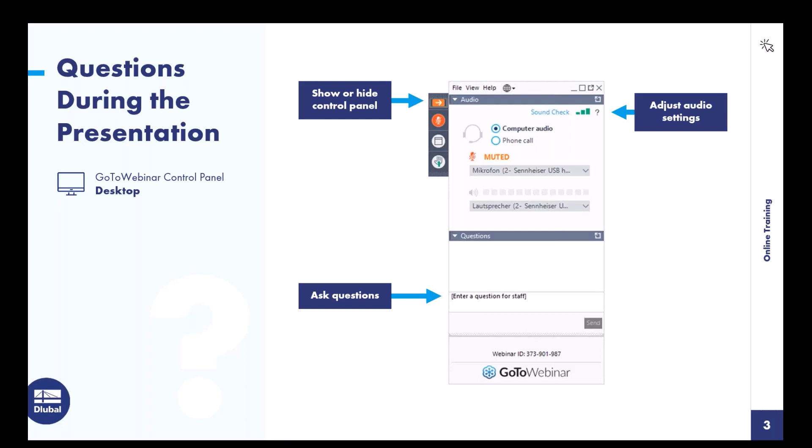I would now like to give you a brief overview of the training series. In today's training, you will receive an introduction to the strength of materials. This builds on the first training, which explained how internal forces are calculated. Today, you will learn how cross-section values and stresses are calculated. In upcoming training courses, you will receive an introduction to finite element analysis and then to our design modules.

This brings me to today's training program. I will first give you an introduction to the R-Section program. Using several examples, I would like to show you the modeling options and design methods. In the first example, a thin-walled I-profile is modeled with graphic functions, and I will model it slowly so you can enter this cross-section as well. In another example, I show how to insert cross-sections from the database and add other parts to them. Then I show modeling of a massive cross-section based on a DXF template. Finally, I model a hybrid cross-section.

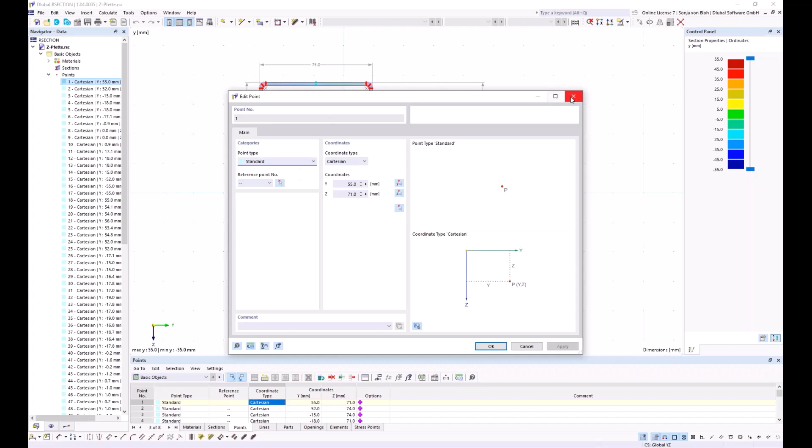It's also possible to open the dialogs for creating new objects. If I go to points, it's possible here to add a new point.

The display navigator, I will turn to this, controls the graphical display in the working window. If the checkbox in front of an entry is unchecked, this object is hidden in the graphic. If I uncheck here the points, you see in the graphic that the points are no longer displayed.

The result navigator controls which results are displayed. You can change here between statical moments, unit stresses, and so on.

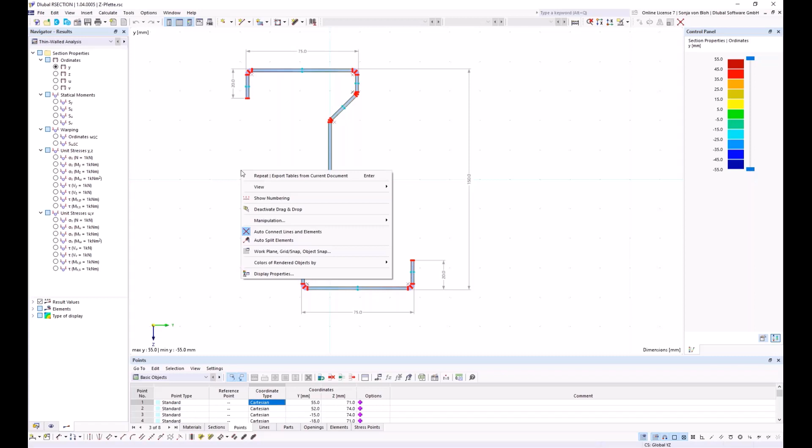Then I would like to go into the mouse functions. To move the section, you can hold down the mouse wheel and move the section accordingly. You can turn the mouse wheel to zoom in or out, and right-click opens the context menu. You can also select objects with the mouse - if you open a window from left to right, everything completely within the selection area will be selected.

If you drag a window from right to left, everything that is intersected by the selection area will be selected. You can also select individual objects. To do this, left-click on an object that you want to select.

To add objects to the selection, hold down the Control key and then left-click on the next object that you want to select. To remove objects from the selection, hold down the Shift key and click on the object that you want to deselect. For the first part of the training, I am now starting a survey again.

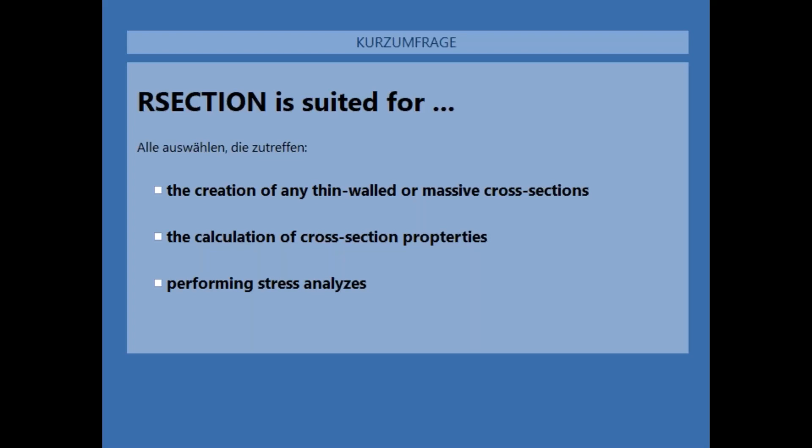All answers are correct. RSECTION is suited for the creation of any thin-walled or massive cross-section, and also for the calculation of cross-section properties and stresses.

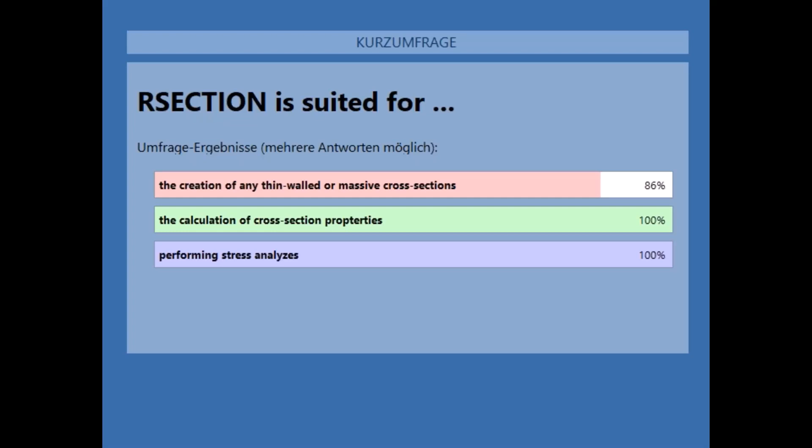This brings me to the first example. To create a custom cross-section, I open the new model window via this button here. Then I have to give the model a name, and I name it here example 1.

Furthermore, the analysis method must be defined. This is here in this chapter, and the following analysis methods are available: the finite element analysis and the thin-walled analysis.

The effective cross-section can be calculated for both analysis methods after activating the extension here under the options. A standard must be selected according to whose rules the individual parts, or the subpanels, are to be generated, and the effective cross-section is to be calculated.

The following standards are currently available: Eurocode 3 Part 1.1 for steel sections, Eurocode 3 Part 1.3 for cold formed sections, and Eurocode 9 for aluminum sections.

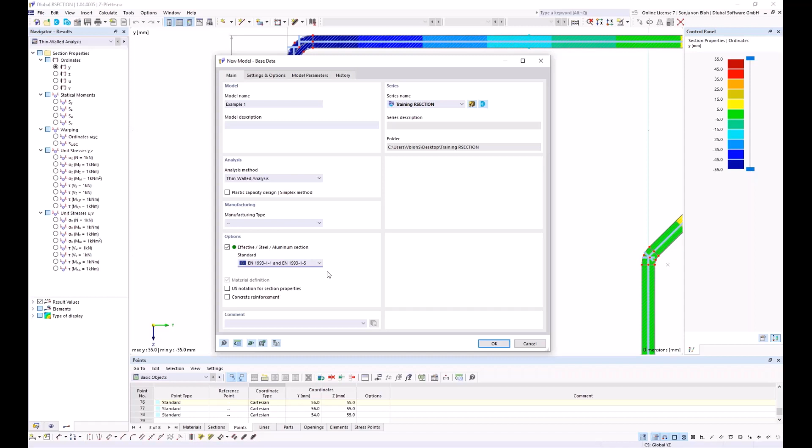I choose here the Eurocode 3 Part 1.1, and then I click on OK. The selection of the design method or the standard is irrelevant when using the R-section cross-section in RFEM or RSTAB. You can select the design method in RFEM or RSTAB regardless of what is set in RSECTION.

Furthermore, the subpanels are generated in the design modules based on the standard selected in the design add-on. In the steel design add-on, the manufacturing type determines which part of the standard is used for the design. For cold formed cross sections, the standard Eurocode 3 Part 1.3 is used, and for hot rolled or welded sections, the standard Eurocode 3 Part 1.1 is used.

Now the file is created. I first define the material, and for this I open the Edit Material window. I can create or copy another material on the list via this button. This creates a new material, and this copies the selected material.

I can enter a material name here directly. RSECTION then lists all materials that match that name. If I enter here S355, then RSECTION lists all materials with that name that are within this database.

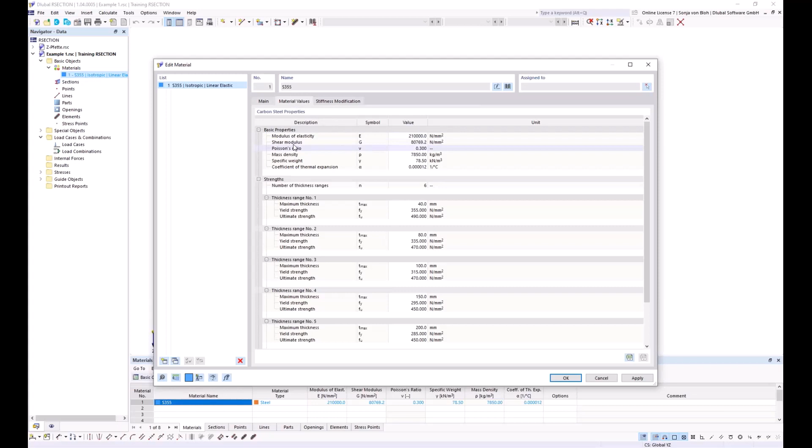If the material is not in the material library, I can create this material by activating the user-defined material option. I can adjust the material values in this tab of material values if I want to. I don't want to do this today, so I uncheck this option again. Then I click on OK.

I then create the elements. The definition of elements is required if the analysis method, analysis of thin-walled structures, is selected, or if the effective cross-section is to be calculated.

An element must always lie in an area. This area is called a part in RSECTION. Elements can be created graphically or via a dialog.

The graphical input is called up via the symbol here in the toolbar, and the input via dialog is called up via the navigator data. If I go here, I can create a new element via the dialog.

When creating an element with graphical input, the part is also created. When creating an element via the dialog box, the parts and the points of the element must be created beforehand. This is why it's not possible here to call up this dialog, because I haven't created the points before.

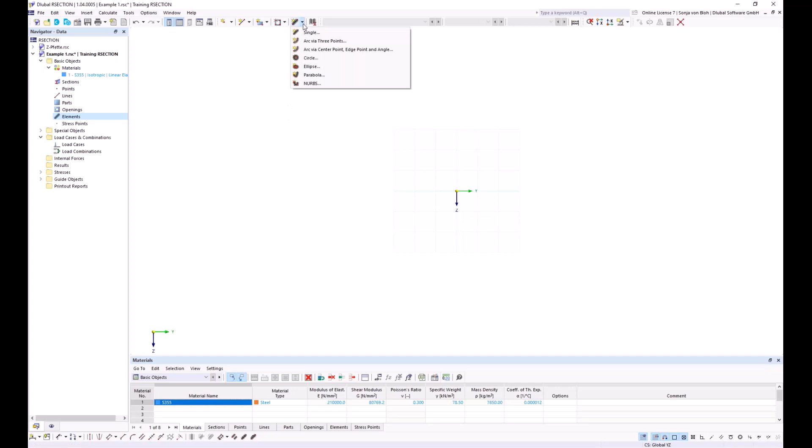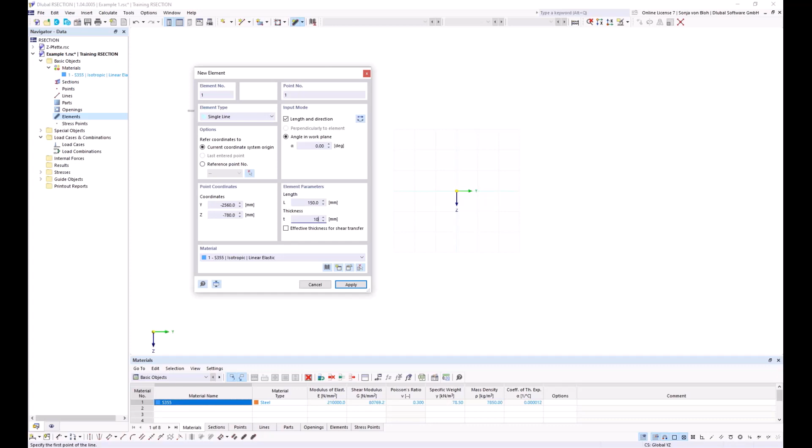I enter the element graphically, so I use this function single, and I enter the bottom flange here first. I choose the input mode, length, and direction, and I choose an angle on the work plane of 0 degrees. I define for the flange a length of 150 millimeters and a thickness of 10.7 millimeters, and then I left click here on the working window.

Then I create the web. Elements must be connected for the calculation of the effective cross-section. The connection is made via the start and end points of the elements. If two elements share the same points, they are connected.

For the web, I also use the input mode, length, and direction. Here I define an angle in the work plane of about 90 degrees, and I change the direction. Then I define the length of 289.3 millimeters and a thickness of 7.1 millimeters.

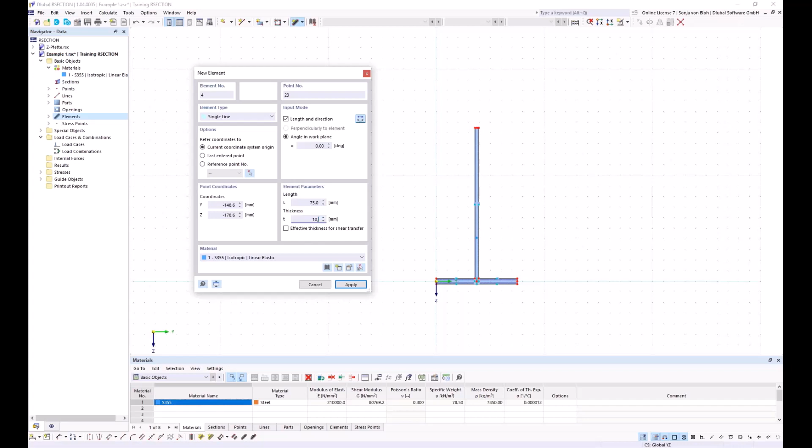I create this web. Then I create the left flange, and for this I also use the input mode, length, and direction. Here I change the angle on the work plane to 0 degrees. I change the length to 75 millimeters and the thickness to 10.7 millimeters.

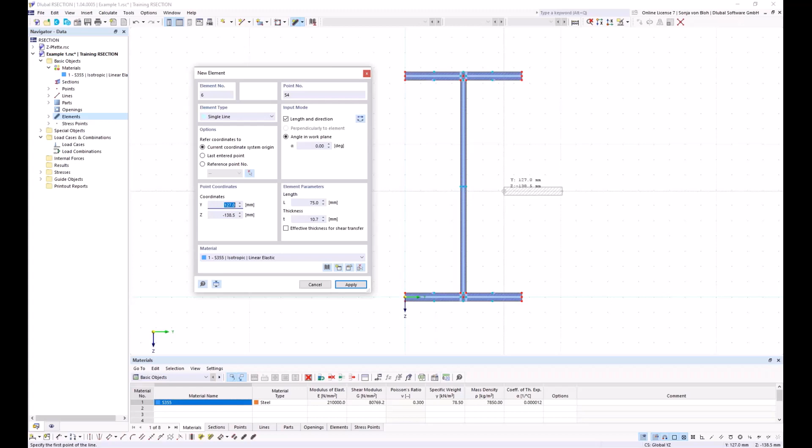Now I have to create the flange on the right side. For this, I reverse the direction, and then I create this element. I now click on the right mouse button. This closes my window. The profile should be a rolled T profile to which a lower flange is welded.

The round radius is 15 millimeters. I can define lines to create them or use the create round corner function. I find this function here below, and in this dialog I have to define the round radius. This should be 15 millimeters, and then I click on the corresponding lines.

Then I click on the right mouse button to close this window. The lower flange is welded with a 6 millimeter double fillet weld. I create the welds using the create angled corner function. I find this here. There are two corner types: both edges, where I can define the length of the edges, or corner type edge and angle, where I can define just one length and an angle.

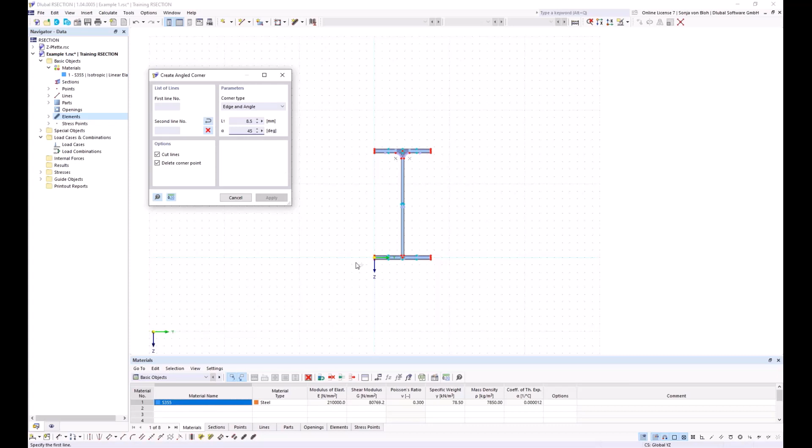You can also calculate in the dialog. So I define 6 multiplied by the square root of 2, and I define an angle of about 45 degrees, and then I click on the corresponding lines.

I would also like to use this example to show you how to calculate stresses and the effective cross-section. In order to calculate stresses or the effective cross-section, a load case must first be created. A load combination can also be formed.

I create a load case first, and for this I go into the navigator data, right-click, and choose a new load case, and I name it N. And I want to create a second load case. For this, I use this button, create new load case, and I name this load case M.

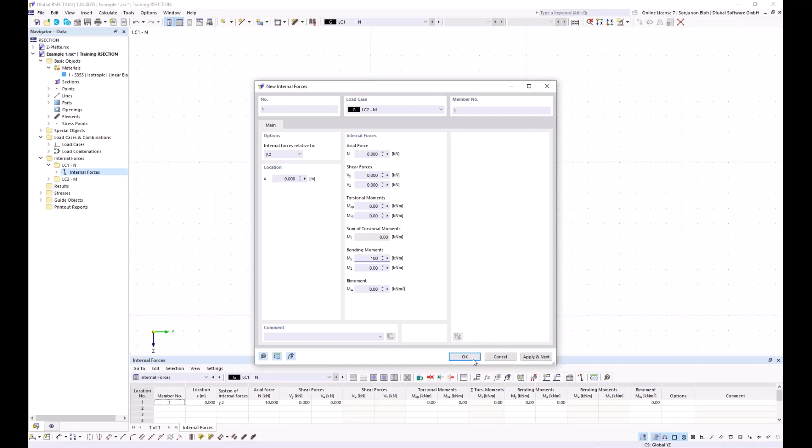And I click here on OK.

The blue dots you can see on the graphic are the stress points. Stresses are calculated and displayed at these stress points, which are generated automatically, though they can also be defined manually.

I want to do that here, so I go to the navigator data again. I find the three stress points, right click, and define a new stress point. It's possible to define the coordinates manually, or to select a point in the graphic and import its coordinates.

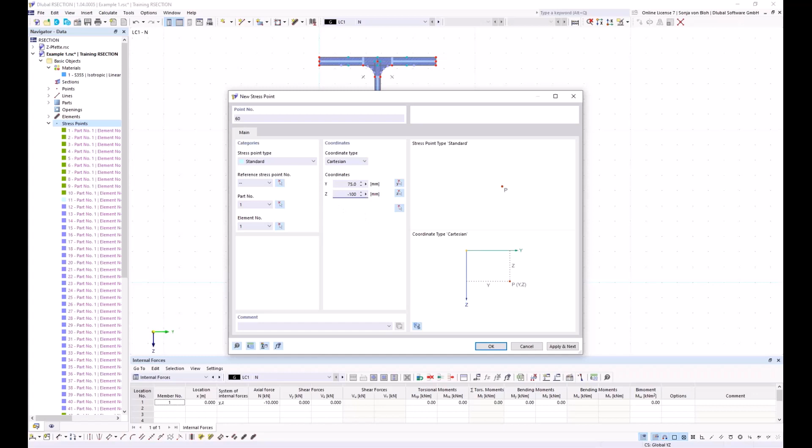I define here for the Y direction 75 millimeters, and for the Z direction -100 millimeters, then click OK. This stress point is now created. If I want to find it, I can right-click on the stress point in the navigator data and use the find function, and you see the stress point is located here.

Which stresses are to be calculated and output in tabular and graphical form can be set in the stress configuration, found also in the navigator data under Stresses, Stress Configuration. If you double click on it, the corresponding window opens, and here via these checkboxes you can check or uncheck the stresses you want to calculate.

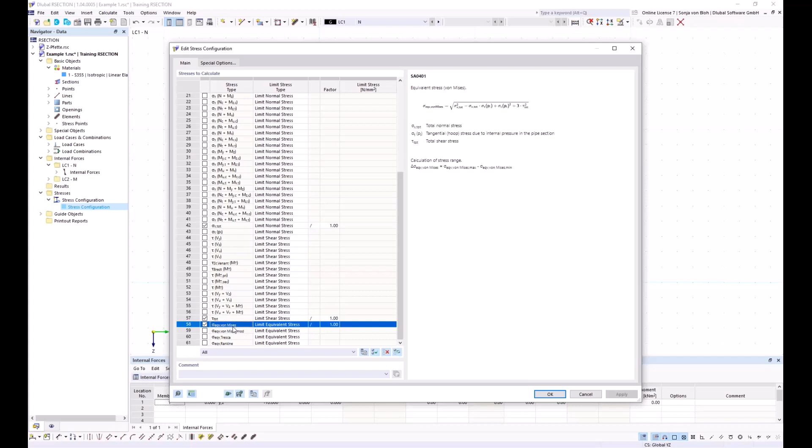Here, these stresses are calculated: the total normal stress, the total shear stress, and also the equivalent stress. I don't want to calculate more stresses, so I click OK.

I'll start the calculation now. For this, I choose in the menu Calculate All.

In the results navigator, you can switch between the gross cross-section, which is the thin-walled analysis, and the effective cross-section, which is the effective thin-walled analysis. The same is possible in the result tables, where you also have the possibility to switch between thin-walled analysis and effective thin-walled analysis.

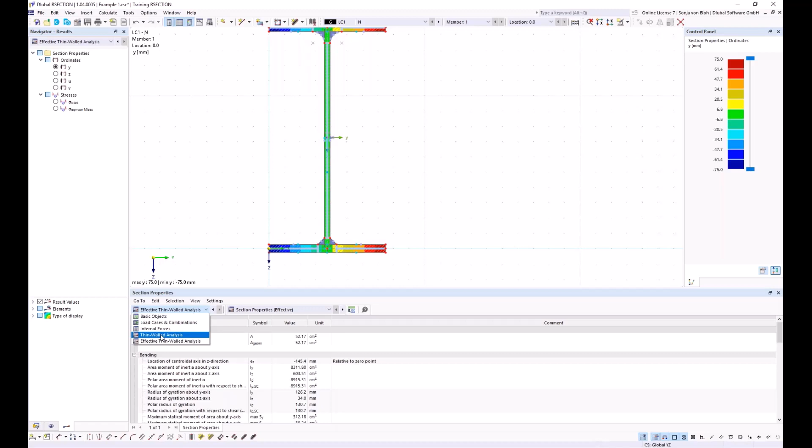Furthermore, you can switch between the results of the individual load cases, and you can also display the stresses. Now the stresses sigma x total are shown for load case number 1. If you want to see the stresses for load case 2, you have to choose that load case here.

I first look at the results of the gross cross-section for load case N. The display type can be set also on the results navigator, where you can change the type of display. I change it here, choosing off.

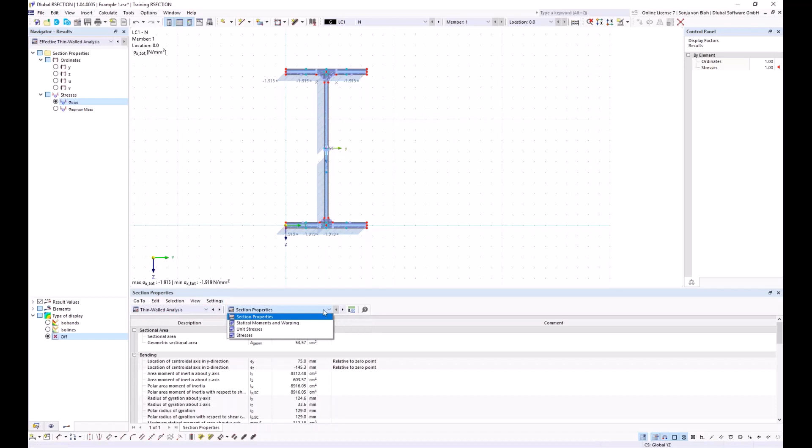I can see the cross-section values here for the gross cross-section. If I choose thin-walled analysis, then you can see here the section properties. The section area is calculated, as well as the area moment of inertia about the Y and Z axis, and so on.

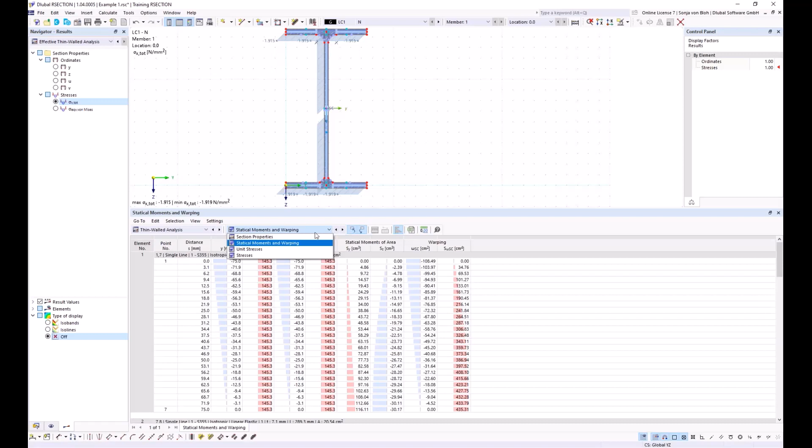You can also see in the tables the statical moments, and it's possible to see the calculated stresses numerically. It's also possible to show these results graphically; you can see the statical moments and also the stresses on the gross section.

If I now want to display the stresses at a specific stress point, I have to switch to the tab All Stresses by Stress Points. If I choose this stress point that I created manually, then the results are displayed for that stress point in the table.

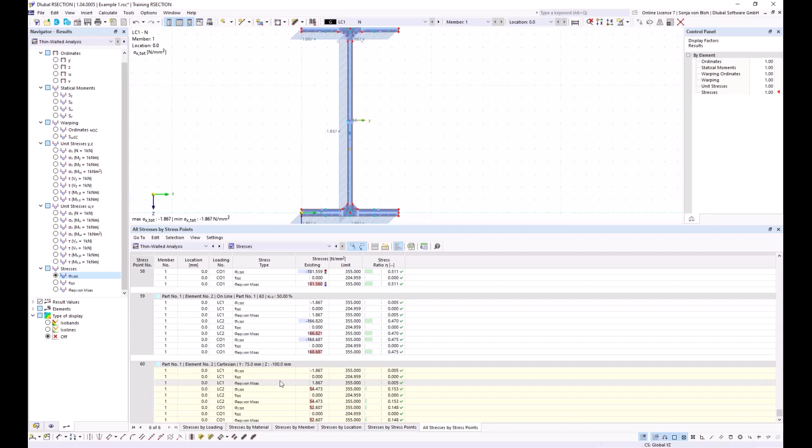In the case of the results of the effective cross-section, in addition to the results of the gross cross-section, there are also outputs for the classification of the cross-section and the effective width of the cross-section.

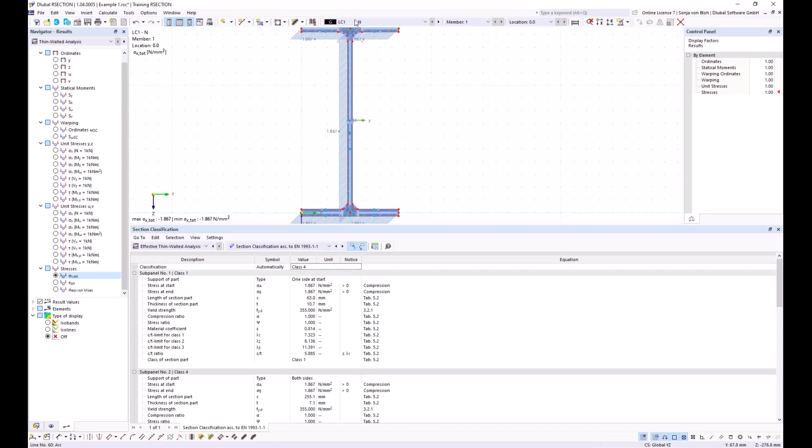I choose here the effective thin wall analysis. I have the section properties of the effective cross-section, and here the section classification. I see that the section falls into class 4 for this load case, axial force.

Local buckling occurs in class 4 cross sections. According to the standard, the reduction in strength due to local buckling can be taken into account through effective widths, and you can see this here in the graphic.

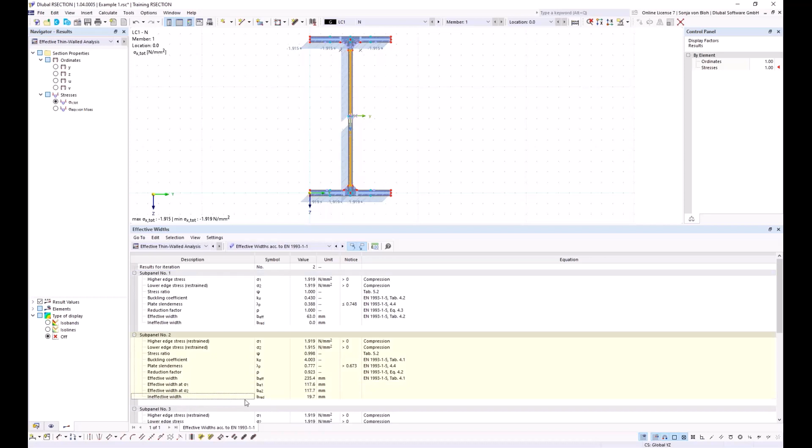If I change to effective thin walled cross section, the web falls into class 4, and therefore the effective widths are calculated. Here an ineffective width of about 19.7 millimeters is calculated, and you can see this reduction graphically.

It's also possible to look at the results of my load case 2. You can see here that for load case 2, this cross section falls into class 1, so no reduction is made.

I'm now starting a survey again regarding the requirements for cross-section classification. I start this; multiple selection is also possible.

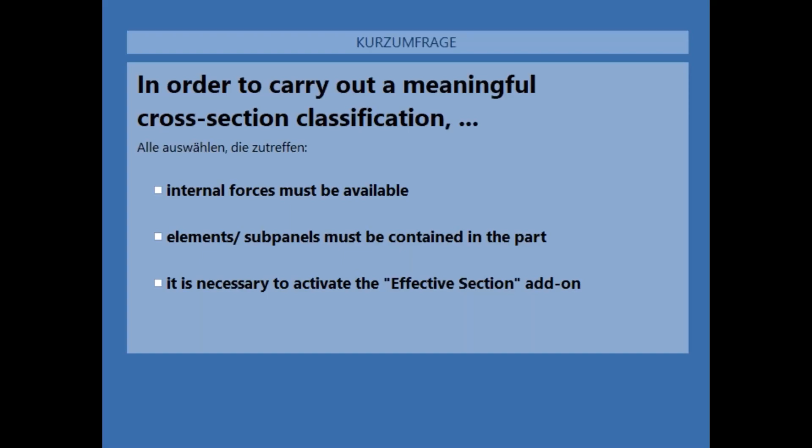Okay, I close the survey and then I share the results.

All answers are correct. For a classification, internal forces must be defined, elements must be defined, and it's necessary to activate the effective section add-on.

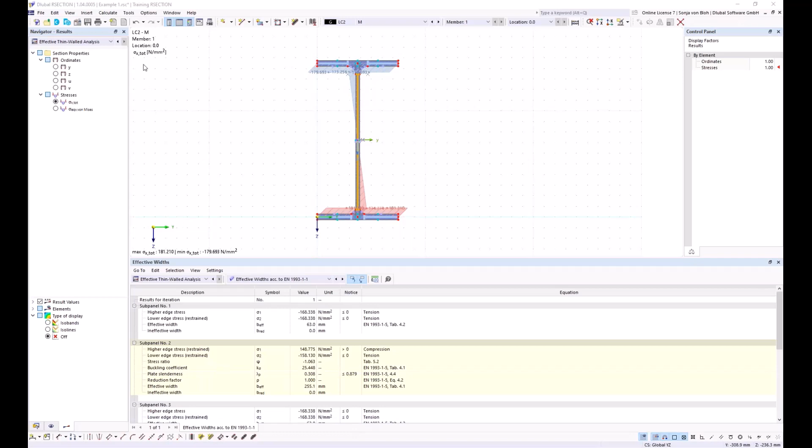I would now like to use another example to show you how you can access cross-sections from the library and modify them. For this, I create a new file. I click here on this button, New File, and name it Example 2. I choose here the analysis method, thin-walled analysis, and I want to calculate also the effective cross-section.

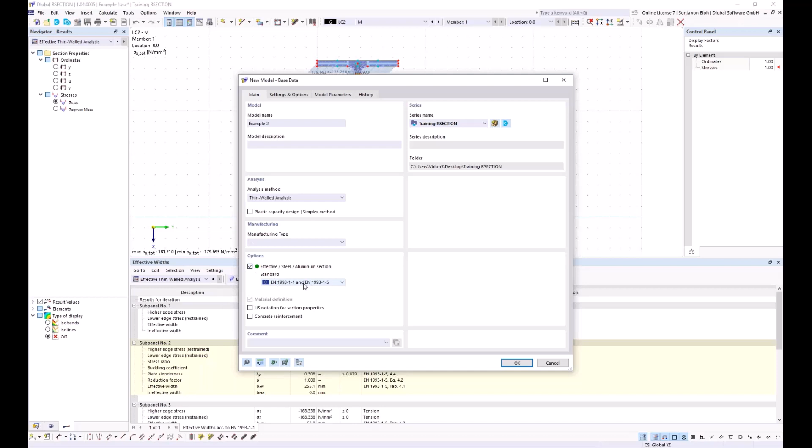So I activate this checkbox again, and I choose here the Eurocode 3 part 1-1. Then I click on OK.

Then I define the material. For this, I double-click on the material and open the material database. Here I choose this S235, and I click on OK. Now this material is defined.

Then I insert a cross-section from the cross-section library. To do this, I open here the new section window in the data navigator. The window is structured like the material window.

A cross-section can be created or copied via the list here. You can create a new section or copy selected sections. I can also enter the name directly here, maybe HEB 100, and then you can see all cross-sections with that name in the cross-section library.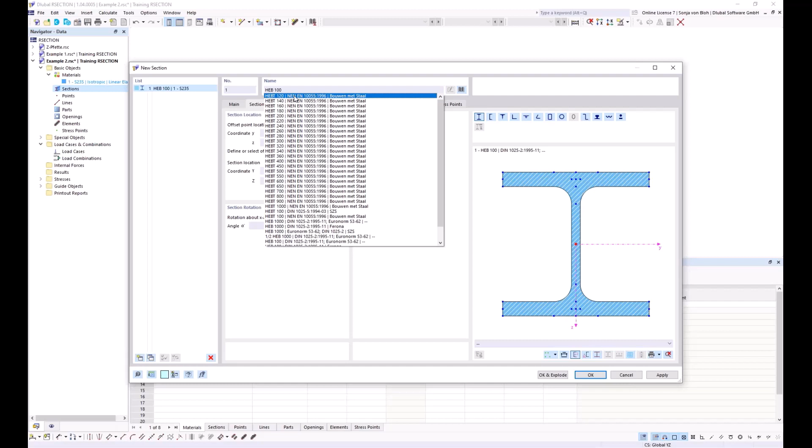I can also open the cross-section library via this button here. A large number of cross-sections have already been entered into the cross-section library. I choose here standardized L cross-section. In the cross-section library, like in the material library, I have filters here on the left, or a search to quickly find the cross-section.

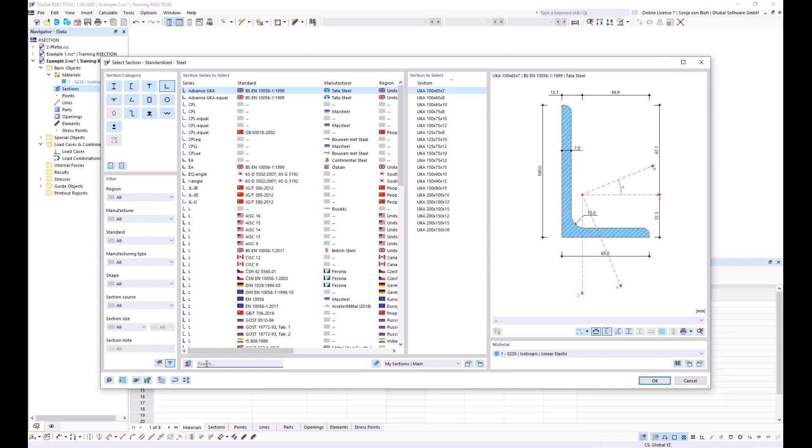I choose here an angle L 200 x 150 x 12, and I choose this standard from DIN, and then I click on OK.

The angle should be mirrored around the y-axis, that's why I activate this checkbox, and the angle should also be rotated about the x-axis about 90 degrees. So I define here 90 degrees.

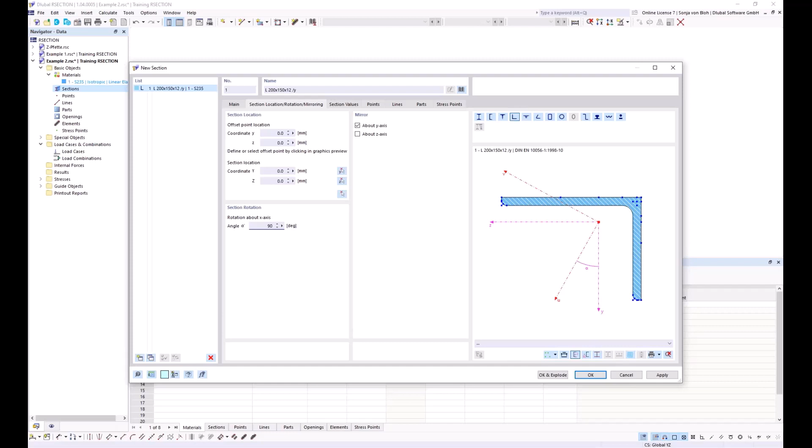Furthermore, I select the offset point in the graphic, and here I select this point, and at this point the cross-section is placed at the insertion point that you can enter here. You can enter it manually, or it's also possible to pick the location in the working window. I pick here this location, and then I click on OK.

When inserting this thin-walled cross-section, two elements are created, and also the corresponding part. The cross-section can be subsequently edited.

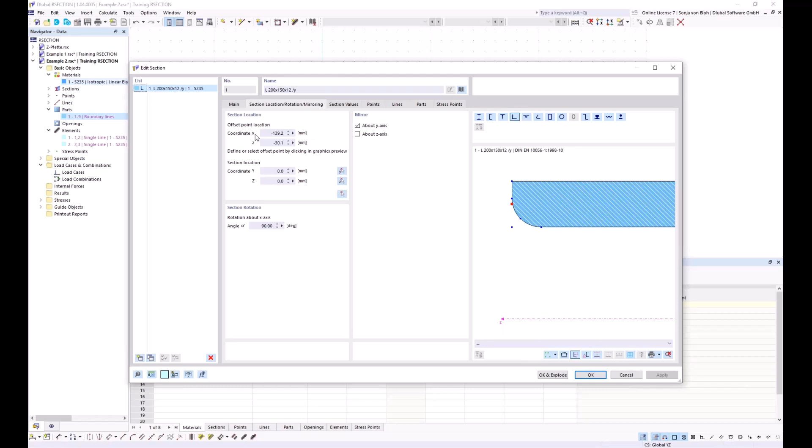If I double-click here, this opens the edit section dialog where I can change or modify the offset point locations and so on. It's also possible to move this cross-section or to rotate this cross-section via this function here.

However, in order to modify individual objects such as points or lines, the cross-section must be split. The cross-section is to be supplemented by further cross-section parts. I therefore split the cross-section into its individual parts, and I can do this by right-clicking on the section, and then I choose here this function explode.

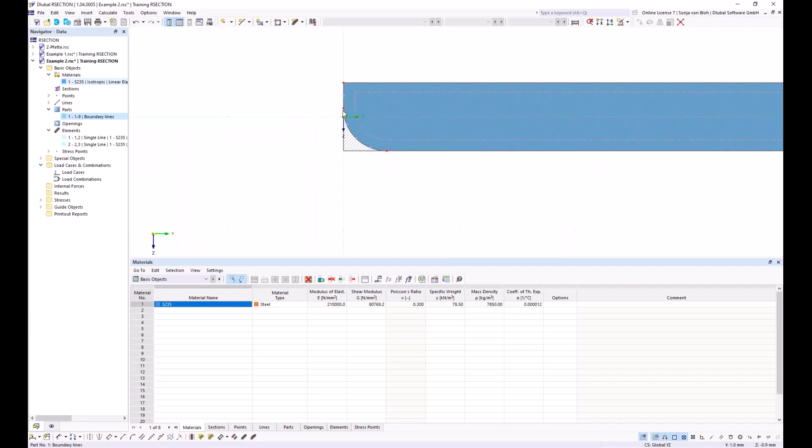The fillet isn't needed, so I will delete that. I delete this point, and now the part is deleted too. Here you can see the elements are colored in red, and this means there's an error for the element.

The elements must lie in part. The part is deleted, so here's an error, but I will create this part later.

I will now add more elements, and I will do this via the graphical input. So I select here a single element, and I use also the input mode length and direction. Angle in the work plane is 0 degrees, and I define here a length of 200 millimeters and a thickness of 12 millimeters.

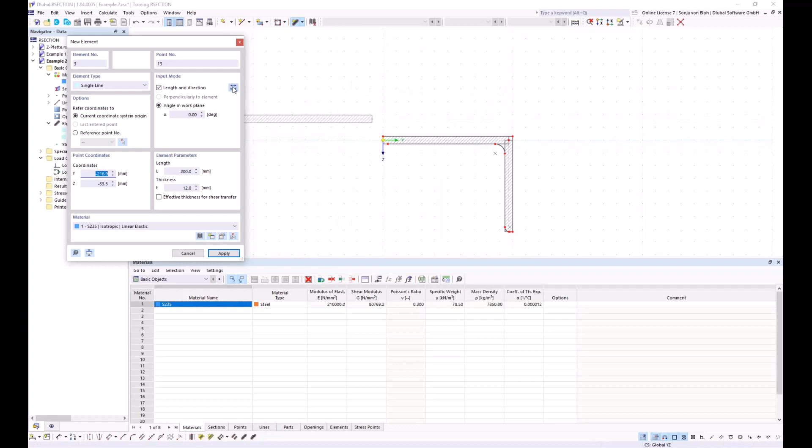Now the direction must be changed, so I click here on reverse orientation, and then I click on this point. Another element for the web should be created. To do this, I use also the input mode length and direction.

Here I define an angle of 90 degrees, and I have to reverse the orientation, and the length should be 400 millimeters and the thickness 10 millimeters. And then I click here on this point.

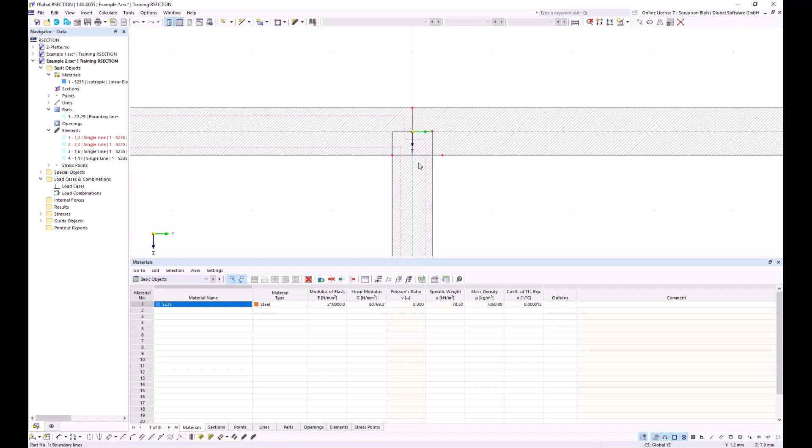I delete unnecessary lines. For this, I click with my left mouse button on this line, and then I click on delete. I will do this with this line also. I select it, then I click on delete.

Welding seams should also be taken into account in the cross-section properties. I create the weld using the angled corner function. So I open this dialog again.

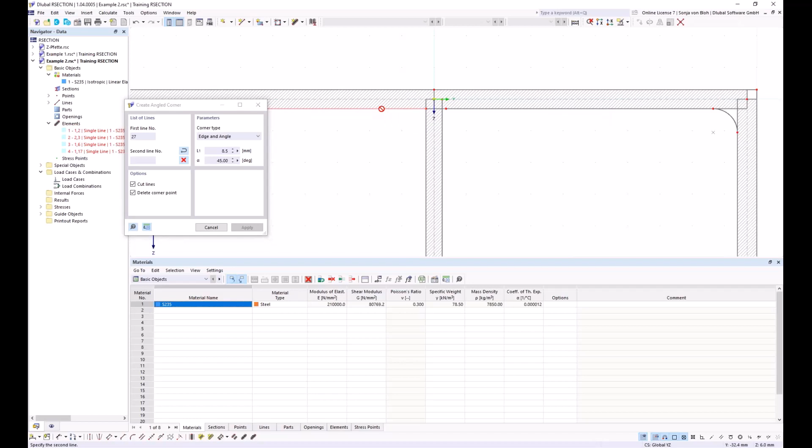I choose the corner type, edge and angle, and a 6 millimeter double fillet weld is to be defined, so that I define here 6 multiplied by square root of 2, and I define an angle of about 45 degrees, and then I click on the corresponding lines.

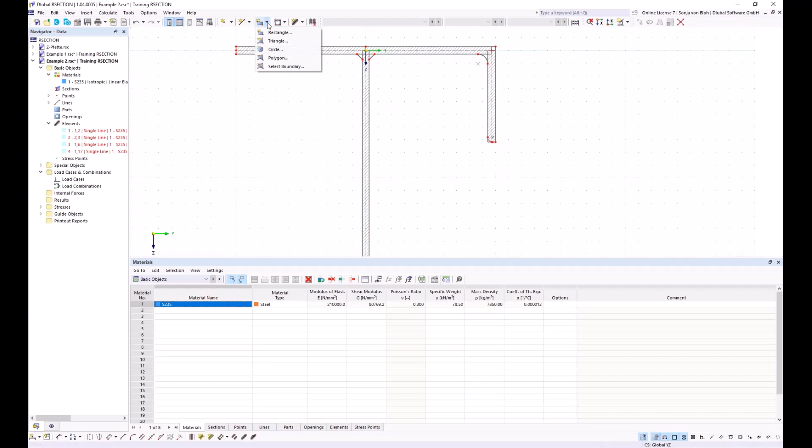Furthermore, I still have to create the part, and I will do this using a function that I can find here: select boundary. For the new part, I have to define a material. This should be the created material, S235. Then I click on OK, and then I click on a line, and now the part is created.

The cross section is now complete. I would now like to calculate the effective cross section and the stresses, so I create load cases and internal forces. I create the load cases first.

For this, I go to the navigator data and choose here new load case. I name this load case N, and I create another load case via this button, create new load case, and I name this load case M.

I also create a load combination. For this, I go to the tab load combinations, and I click on this button here, create new load combination, and then I add all load cases to my load combination. And then I click on OK.

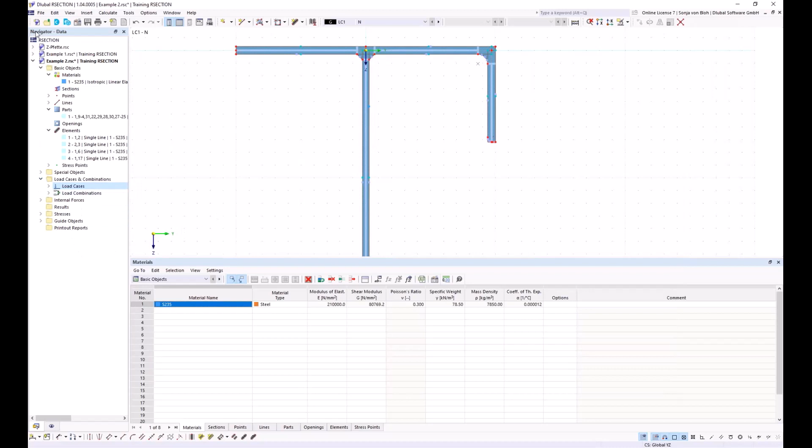Then I have to define the internal forces. To do this, I go to the navigator data, open internal forces, and then I define here an axial force of minus 50 kilonewton. I click on apply and next.

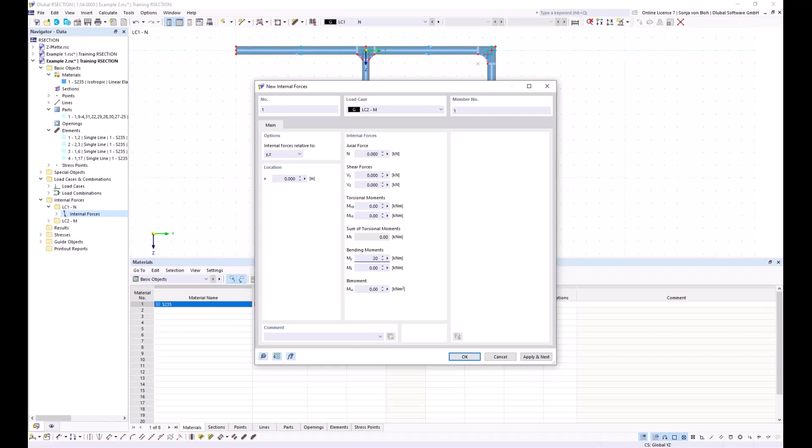I change the load case to load case 2. I define here an axial force of 0 kilonewton and a bending moment of 20 kilonewton meter. And then I click on OK.

Then I start the calculation. I choose here calculate all, and I look at my effective cross-section. This cross-section falls in load case 1, also in class 4. I can see here the reduction, and I can see the reduction also in the tables. I can see here the section classification, class 4, and the effective width here for this sub-panel.

I also want to create a printout report, and I will do this via the navigator data, and you find here this printout reports below. Then I click here on new printout report, and then I have to check the report items that I want to add into my printout report. I don't want to see the stresses by material, by member, or location and stress points. And then I click on Save and Show.

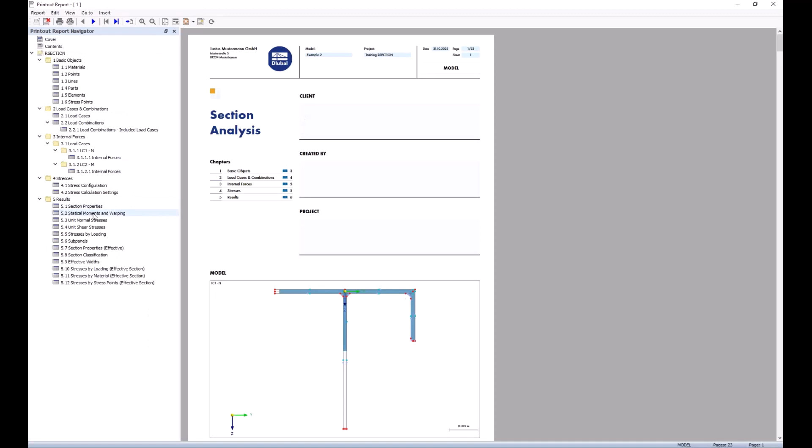Now the printout report will be created. I can see here the numerical results. It's also possible to add graphics to the printout report.

To do this, I hide this printout report, and I use here this function, print graphics to the printout report. In this window, it's possible to define the size of the graphic. Here I choose a window filling. I can see now the preview, and if it's okay, then I can click on button Save and Show. And now this graphic is added to the printout report.

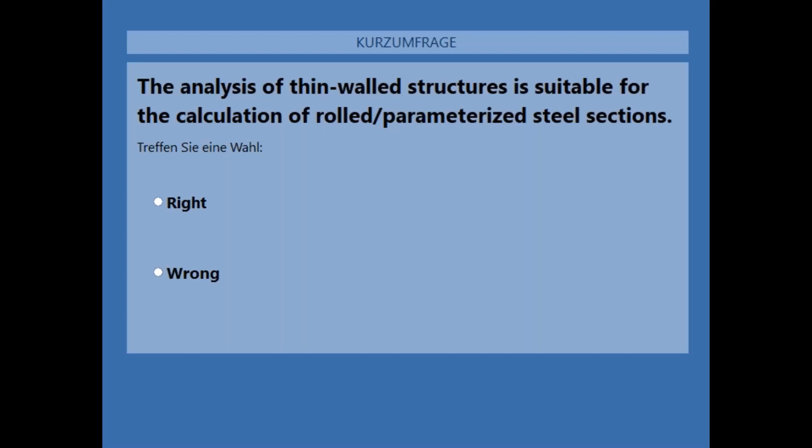I will now close the survey and share the results. The correct answer is that the analysis of thin-walled structures is suitable for the calculation of rolled parametric steel sections, and you have answered this correctly.

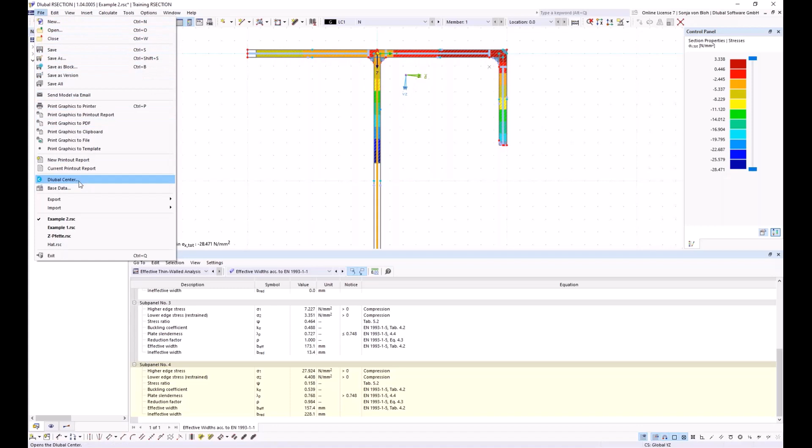In the next example, I would like to show you that you can also create cross-sections by importing a DXF file. A DXF file can be imported via menu File, Import DXF. Then I have to choose the corresponding DXF file, and then I click here on Open.

I don't want to import the DXF file into the active model. I want to create a new one, so I click here on No. And then a new window opens.

In the section Create a Section Model, you have 3 options for creating the cross-section. The automatic creation of elements is useful if the outlines of the cross-sections are available in the DXF file. RSECTION attempts to create center lines for parallel lines and then sets the elements between the intersections. Only elements that do not exceed the maximum thickness that you can define here are created.

The import function, use DXF template lines as center lines, is useful if the cross-section geometry is available as a center line model. The lines of the DXF template are considered as the center lines of the elements. The thickness defined in the field T is assigned equally to all elements. The function create DXF template is useful for massive cross-sections where no elements need to be created. In addition, this function can also be used for complex cross-sections where I only want to create elements for the decisive cross-section parts. With this import function, the lines in the DXF file are imported as lines.

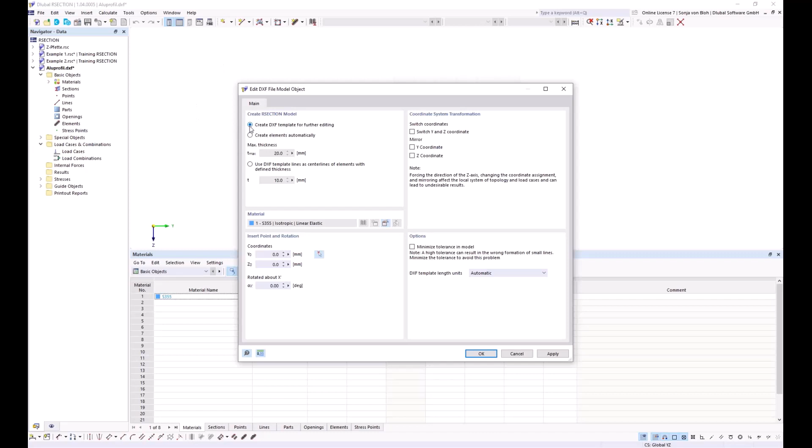You can then use these lines as an aid for modeling. I choose this option now, click on OK, and now the lines are created.

A finite element analysis is to be carried out. To do this, I go here to the base data and choose the analysis method finite element analysis.

The finite element analysis should be performed on massive cross-sections such as timber or concrete cross-sections, in contrast to thin-walled cross-sections where the stresses can be regarded as constant across the cross-section thickness. The stress distribution in solid cross-sections is variable. This can only be determined with a finite element analysis.

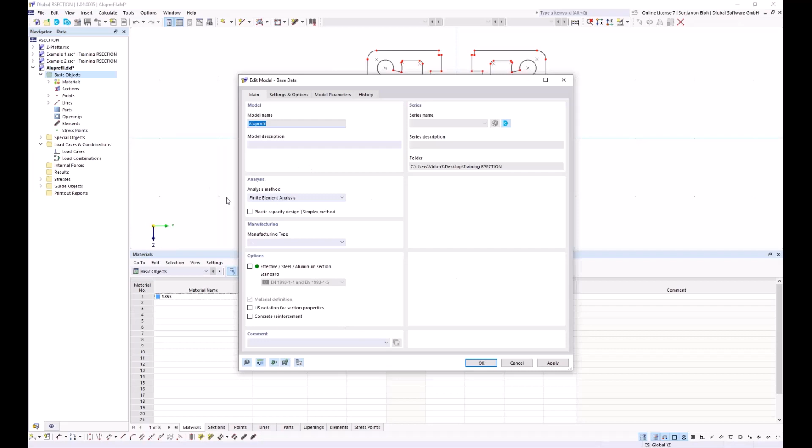So I choose this analysis method now, and I click on OK. Then I have to define the material.

I modify here the created material. This should be an aluminum material. I open the material library, change the filter to aluminum, and use the search function to define a material EN AW-6060. I choose this material here on the bottom, and then I click on OK.

In a finite element analysis, only a surface needs to be defined. This means only the part needs to be defined, but no elements. I would only have to define elements if I also want to calculate the effective cross-section or carry out a classification. So I only have to create the part here, and I create this part via the function select boundary.

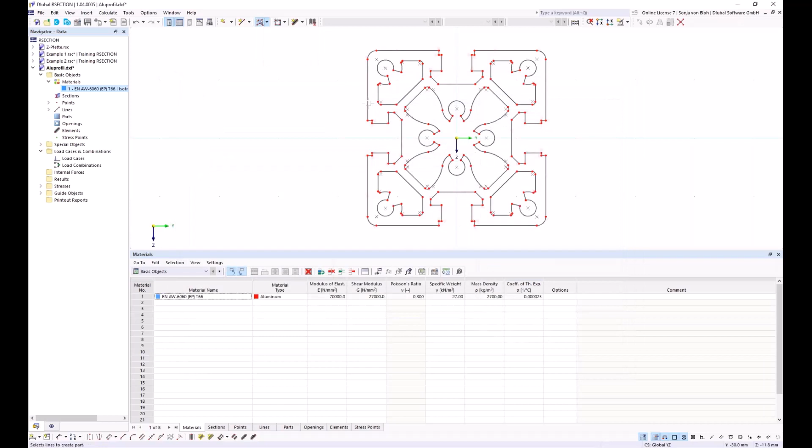I click here on OK, and then I click on a boundary line. Now the part is created. I still need to create the openings.

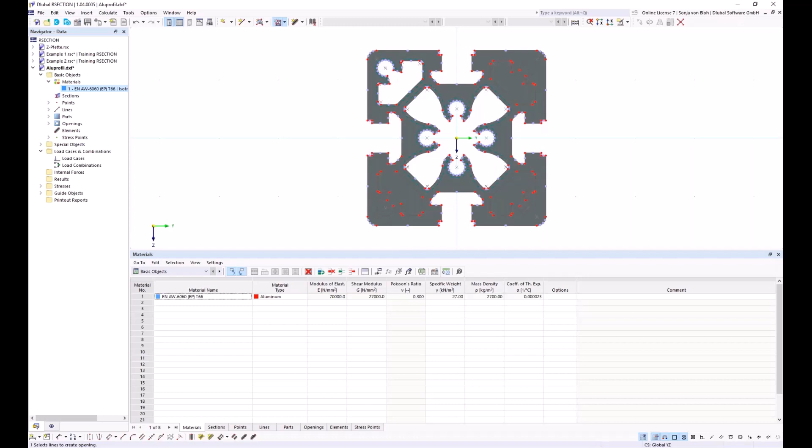I create the openings using a function that I find here, select boundary, and then I have to click on the boundary. I can create the other openings by rotating them. I want to show you this also.

First I have to select the opening that I want to rotate, and then I select the function rotate selected objects. I want to create a copy, and I want to create 3 copies. That's why I define here a number of steps 3, and the rotation angle should be 90 degrees.

Then I have to define the point of rotation. I can also pick this in the window. And if I click now on OK, the openings will be created.

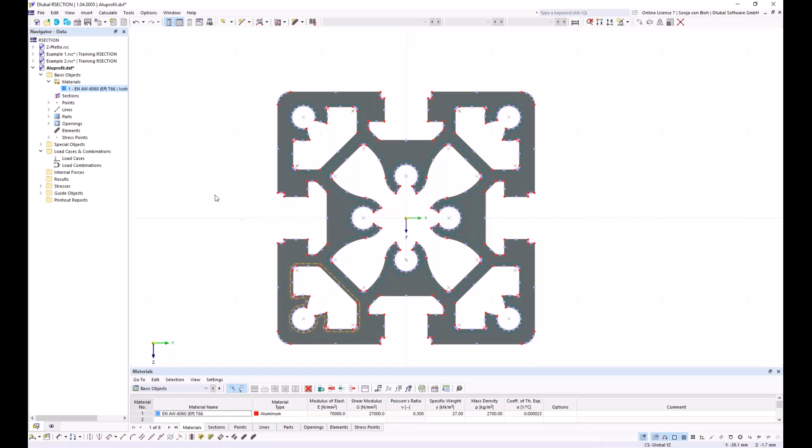I want to calculate the stresses here as well, so I create load cases. For this, I go to the navigator data again, right click and choose new load case. I define here a load case N, and I also define a load case MT. Then I click here on OK.

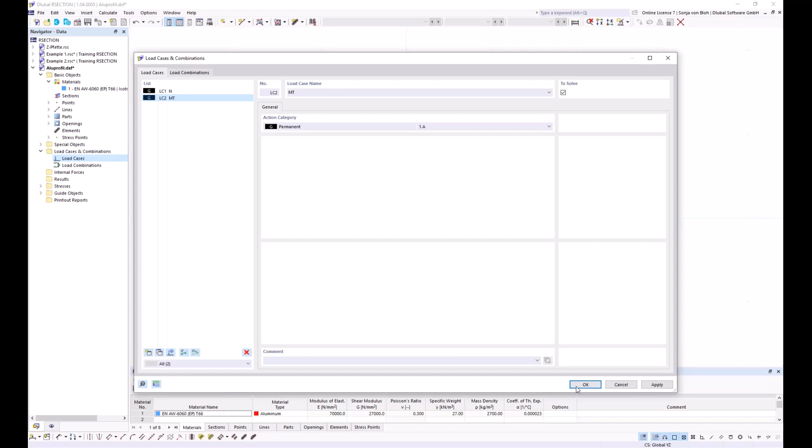Then I define the internal forces via the navigator data again. I open the internal forces dialog and define here an axial force of minus 10 kilonewton in load case 1. Click on apply and next.

Then I go to load case 2, and here I define a torsional moment of 0.3 kilonewton meter. And click here on OK. Then I start the calculation via menu calculate all.

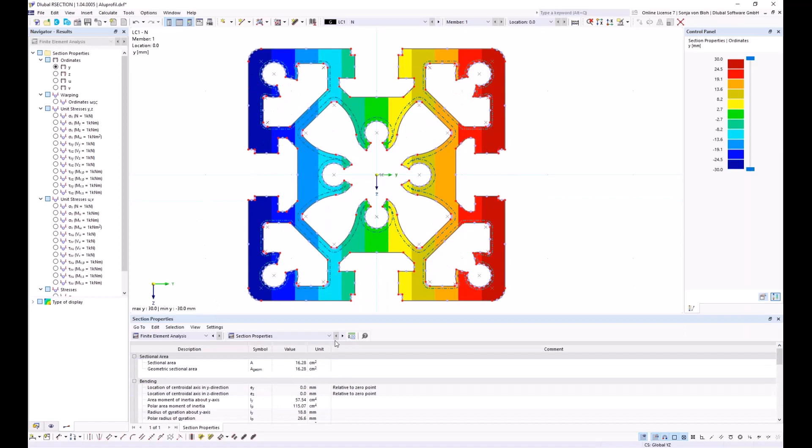And now the finite element analysis is carried out. I have here also the section properties, the stresses in tabular form, and I can also see the stresses graphically. If I choose here, for example, sigma x or tau total, I have to change to load case number 2, and you see it now, the results graphically.

I want to create for this also a printout report. That's why I go to navigator data again, then right click on printout report and choose new printout report.

Here I choose the report items. I don't want to see the stresses by material, member, location, stress points, and so on. Then I click on Save and Show. Then the printout report is generated.

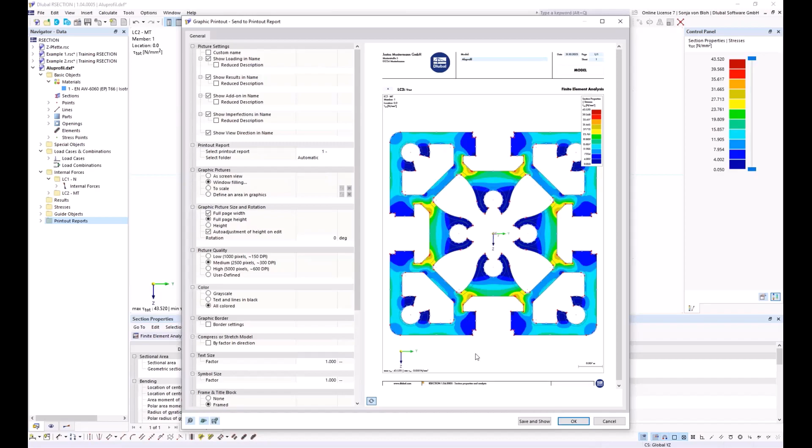I want to also add a graphic to this printout report. So I go here to this function, print graphics to printout report. This should be window filling. Then I click on Save and Show. And now this graphic is also added to the printout report.

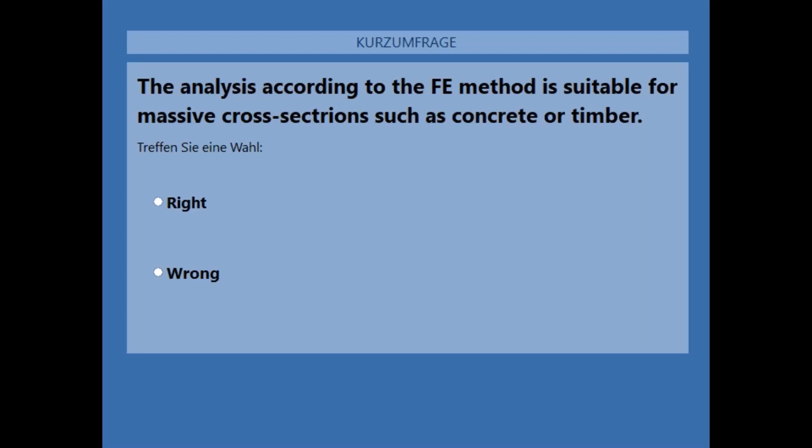Nearly all of you have answered this question, so I'll share the results. The correct answer is that the finite element method is suitable for the calculation of massive cross-sections. Most of you gave the correct answer.

As a last example, I show the modeling of a composite cross-section. In RSECTION, it's also possible to model cross-sections that consist of different materials. Ideal cross-section values are determined for such a cross-section: a 1000 millimeter wide and 200 millimeter high concrete cross-section lying on an HEB steel cross-section is modeled in this example.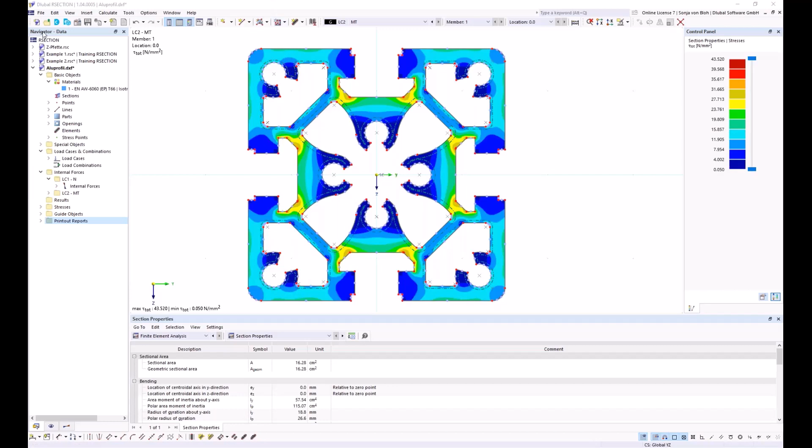For this, I create a new file and name it example 4. I choose the analysis method finite element analysis, and then click OK.

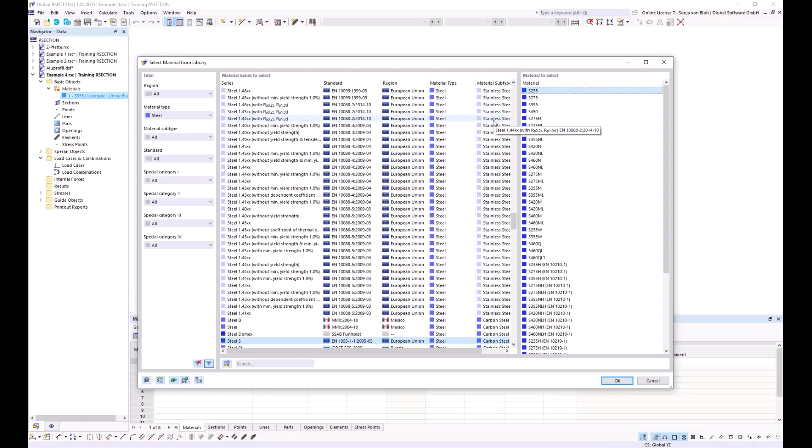I define two materials. For this, I open the material window, and for the first material, I define a steel material. This should be an S235. I open the material library and choose the S235 material, and I add a new material, a second material, to the list via this button, create new material.

Then I open the material library again. I choose here the material type concrete, and I choose a C40/50 material. Then I click on OK, and also OK.

The first material is always the reference material. In RStab or RFEM, however, I have the option of defining other materials.

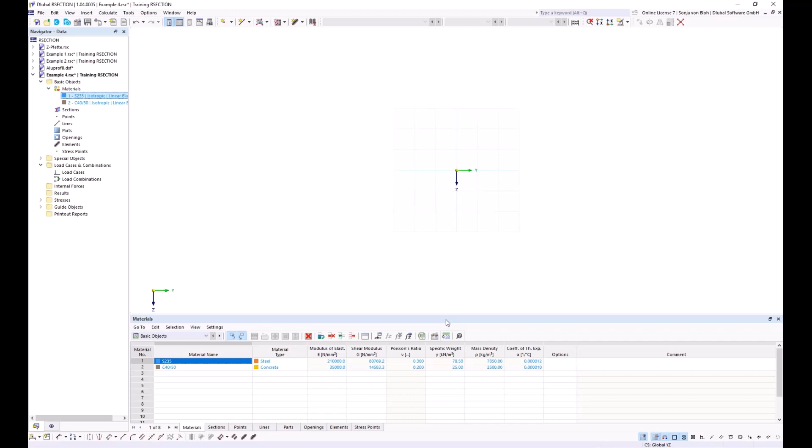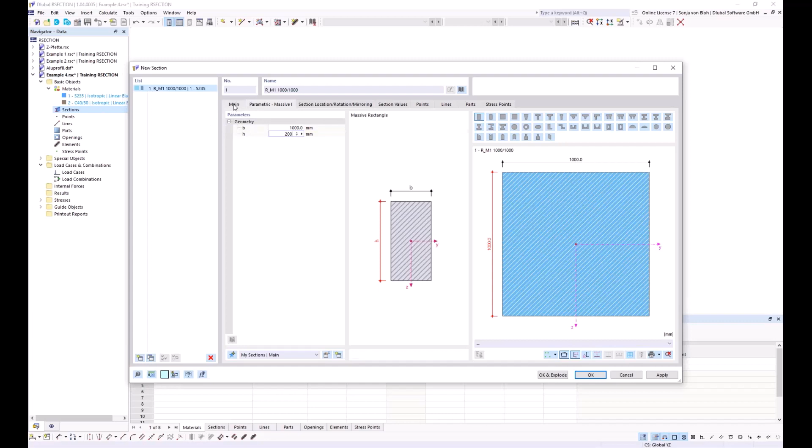First, I model the concrete cross-section with dimensions 1000 to 200 millimeter, and I will do this via section. So I go to Navigator Data, New Section. Then I open the section library, and I choose here a massive rectangle cross-section. I define B as 1000 millimeter, and H as 200 millimeter, and I assign the concrete material for this. Then I click OK.

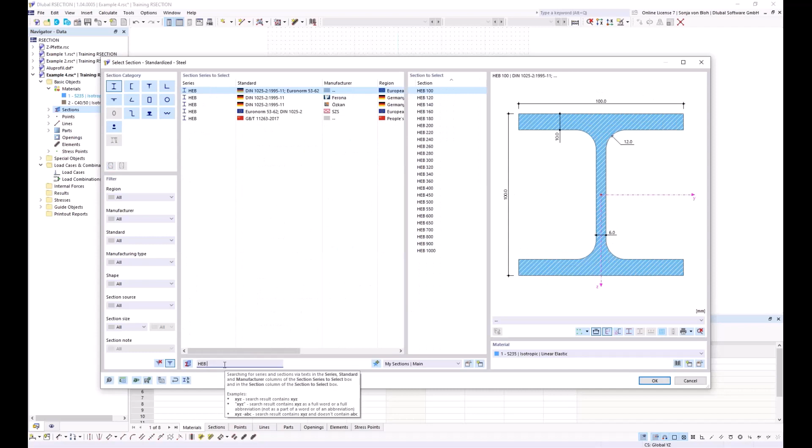Now this cross-section is inserted into the file, and I create a second cross-section. For this, I go to Navigator Data again, New Section. This should be the steel cross-section. I open the section library again, choose I-beams, H-beams, and define an HEB of 400. I choose this one, and select the material S235.

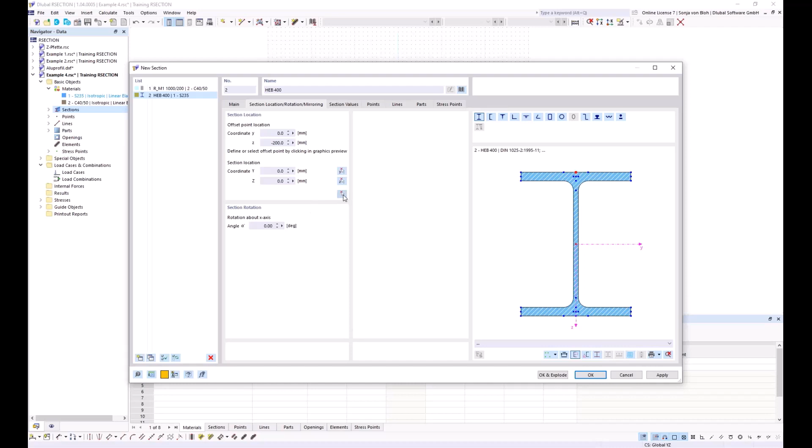I click on OK, and I choose the center of the top flange as the offset point. So I click here on this point in the graphics, and choose the section location, here the bottom of the concrete rectangle. Then I click on OK.

I want to calculate the stresses also, and for this I create a new load case. So I go to Navigator Data, new load case, and define the load case name M. I click OK, and in load case M, I define a bending moment about the y-axis of 100 kilonewton meter. I now start the calculation.

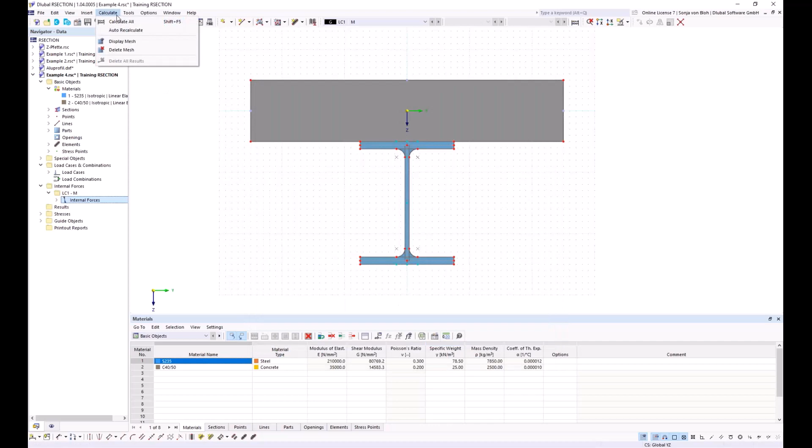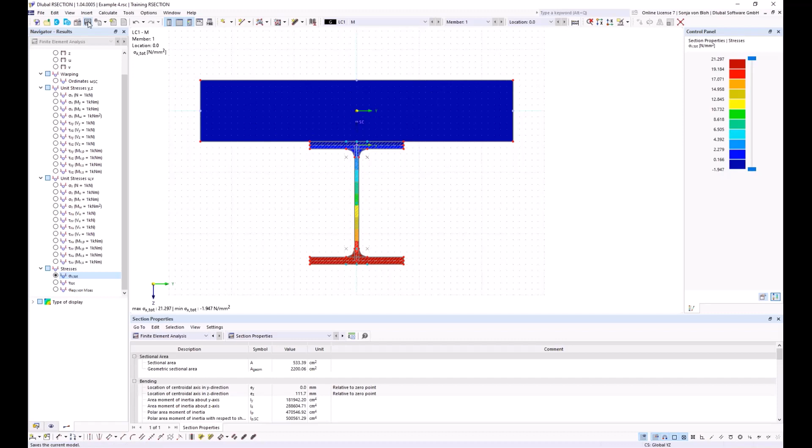I can see here the stresses, and I would also like to show you how to import the cross-section into RFEM. To do this, I first save the cross-section, and I now open RFEM 6, and create here a new file.

I name it example 1, and then click OK. Then the new file will be created. I import the RSECTION cross-section into this file first.

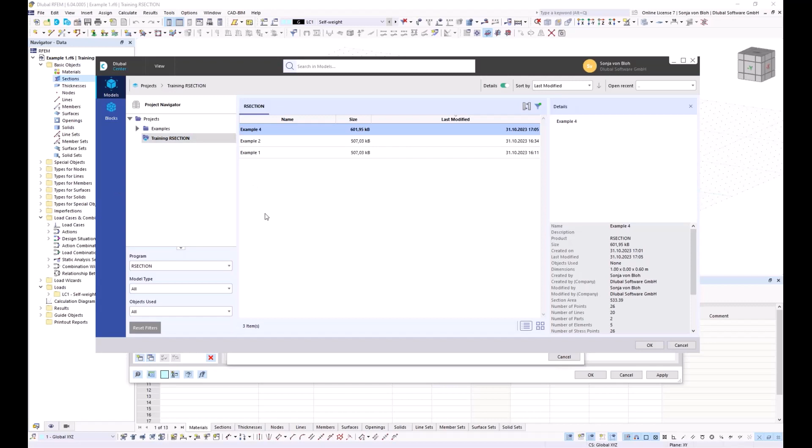For this, I go to Navigator Data, right-click on Sections, New Section, and then open the section library, where I have the possibility to import a section from RSECTION. I click on this button, and this opens the Dlubal Center. In the Dlubal Center, I choose this example 4, and click OK.

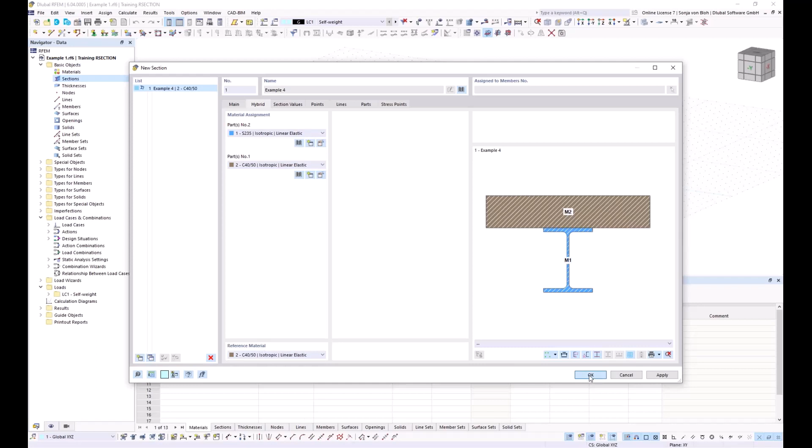And now this cross-section is available in RFEM 6. I have here also the tab hybrid, where you can see the material assignment, and if you want, you can also change the materials here for parts 1 and 2, and it's also possible to change the reference material.

It's also possible to create a member with this cross-section. To do this, I click here on New Single Member. Then in tab Section, I choose this cross-section, which is my example 4, and then I create this member.

With this example, I have come to the end of the training. It was taught how you can create general cross-sections with graphic functions, how you can add cross-section parts to database profiles and create profiles based on a DXF import, and also how to create hybrid cross-sections.

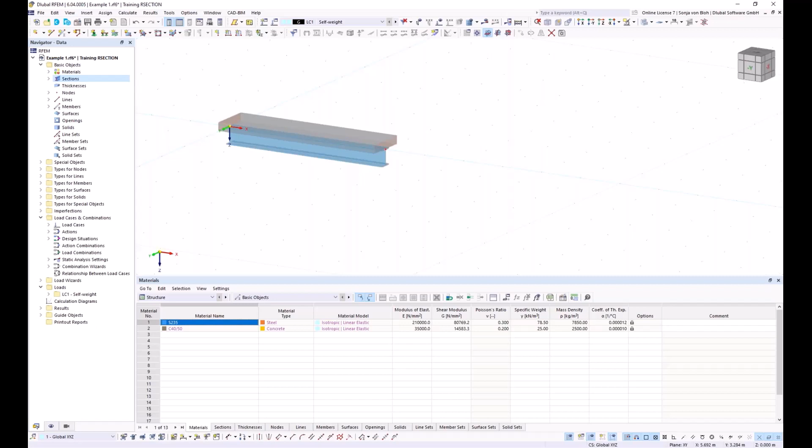Finally, I would like to show you where you can find more information on our website. You will find in the tab Support and Learning frequently asked questions. You can also find knowledge base articles, news and events, and our webinars.

I hope that the training for using RSECTION has helped you, and I thank you for your attention.